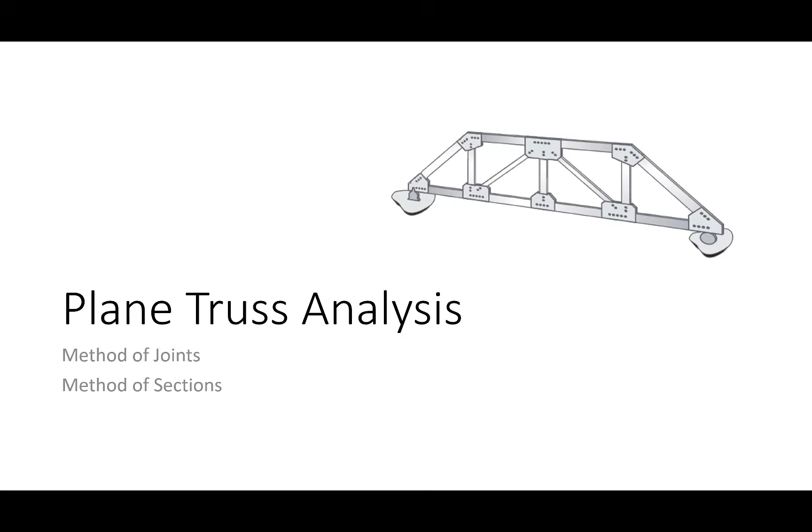Now, I went forward one more slide than I wanted to. There we go. So let's talk about trusses, though, before we go too far down the rabbit hole—let's talk about trusses in the context of civil engineering. First off, hopefully we all know what a truss is: it's just a triangular arrangement of members, or members in triangular patterns.

Characteristics of trusses is that the members are straight, they're not curved or arched, and that they are arranged in some sort of triangular pattern or triangular network. Trusses themselves can either be a component of a structure or they could just be the structure.

Examples of a component of a structure would be like a roof. It's very common for trusses to be roof elements, mainly because they allow for easy drainage of the water or snow on top of the roof. They also are very nice as options for bridges.

The thing about trusses for bridges, though, is that from an economy standpoint, trusses usually are only economical when you have relatively long spans. For short spans, you're not really going to see a lot of trusses constructed because we can just handle that with beams, or a beam and slab, or honestly just a solid slab system if it's really short, or maybe a culvert. We don't really need trusses until the spans get really long.

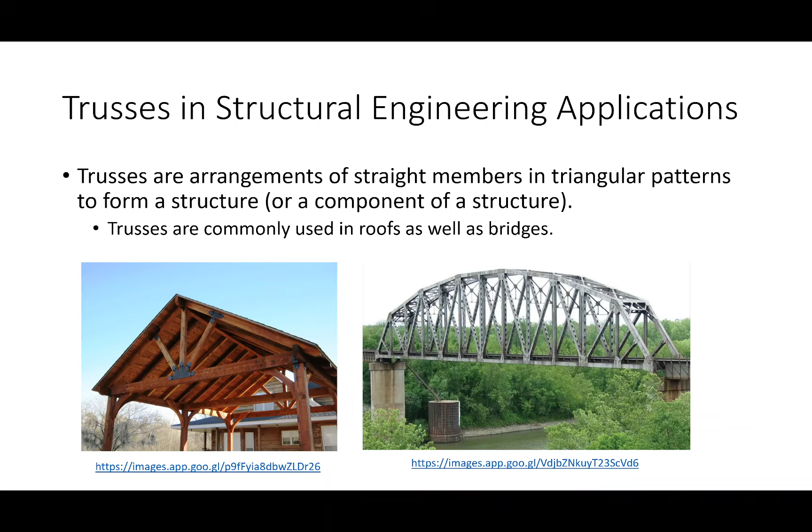Is there a relationship between the two? Yes, but they're not the same thing. Stiffness would be, for example, imagine I had two springs in my hand, and I stretched them with a force of, let's say, 10 pounds. Stiffness would be, if I put 10 pounds on spring A versus 10 pounds on spring B, how much does spring A versus spring B stretch? If spring B stretches more than spring A under the same load, then spring B is not as stiff, even if neither of them break under 10 pounds. Does that make sense? So that's the difference between strength and stiffness. And trusses are incredibly stiff systems.

All right, let's talk about trusses, though, as structures as they relate to our mathematical modeling. Remember, we do not analyze structures as much as we analyze mathematical models that represent them. So we make a series of assumptions when we analyze a truss, and we make three basic assumptions, but these three basic assumptions are really focused on trying to achieve a given result. We'll talk about that result here in a second. But let's go through them each one at a time.

Assumption number one is we assume that all of the members are connected by frictionless joints. Now, is that assumption 100% true in the real world? No. Friction always exists when two surfaces are in contact, so we can talk about the degree of that, but what is this assumption trying to get at? Essentially, it's trying to get at is that there's no forces in the system other than what you can see directly from the model. In other words, you've got member A connected to member B, and they're loaded, but there's not also some friction between two components that we need to account for. We can sort of ignore that for the purposes of analysis. So it's basically trying to say that what's on the model is really what you need to account for, and that's it.

What about assumption number two? Assumption number 2 and 3 are very related, even though it might not seem like it. Assumption number 2 says that all the loads and all the support reactions are applied at the joints.

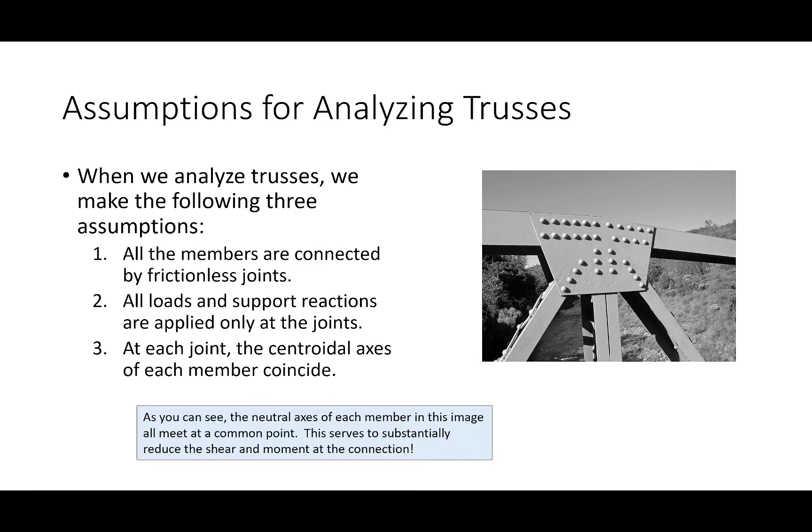That's what I meant when I said these two are related. Assumptions 2 and 3 are saying all the members meet at common points and all the forces are applied to those points. Assumption 1 is basically saying those are the only forces you need to consider—you don't need to consider friction or anything else going on in the system. So it is from these 3 assumptions that we can idealize trusses as only carrying axial forces.

If I have an arbitrary structure, some random frame or beam, and I take a samurai sword or lightsaber through that system, at any arbitrary point I might get 3 unknowns: an unknown axial force, an unknown shear, and an unknown moment. But a truss is a special system. Because of the assumptions baked into the truss, coupled with the way I fabricate the system, instead of having an axial force, a shear, and a moment, I only have an axial force. The question is whether that axial force is in tension or compression. So instead of 3 potential unknowns for each member, there's only 1.

This could be 20 kips in tension, it could be 30 kips in compression, it could be 0. We will talk about zero force members a little bit later—I think probably on Monday. Does that make sense?

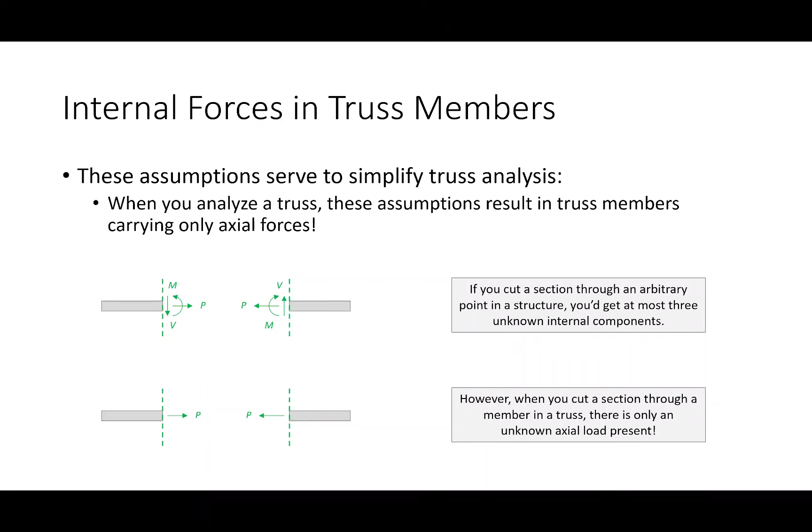Now, has it been a while since you looked at this stuff? Been a while, right? Then this is an apt discussion. Let's go back to the wonderful world of statics, and let's have ourselves a collective discussion about ENGR 213. The very first thing you discuss in statics, after your intro review and all that jazz, is a concurrent force system, otherwise called a particle statics problem.

Y'all remember that? Like a problem where you'd have, I don't know, let's see if this rings a bell. You have a floor, an eye bolt, then a rope going this way, a rope going that way, rope going this way, rope going that way, all through that point. And the question is, what's the resultant? Y'all remember that? Very fundamental problem in statics. What is the resultant?

When you first take statics, this is one of the first classes of problems you deal with—the particle statics problems. If you remember, let's go back to statics. Does anybody remember how do you solve this problem? So this is F1, F2, F3, F4. Does anybody remember how you go about solving this problem, how you did it in 213?

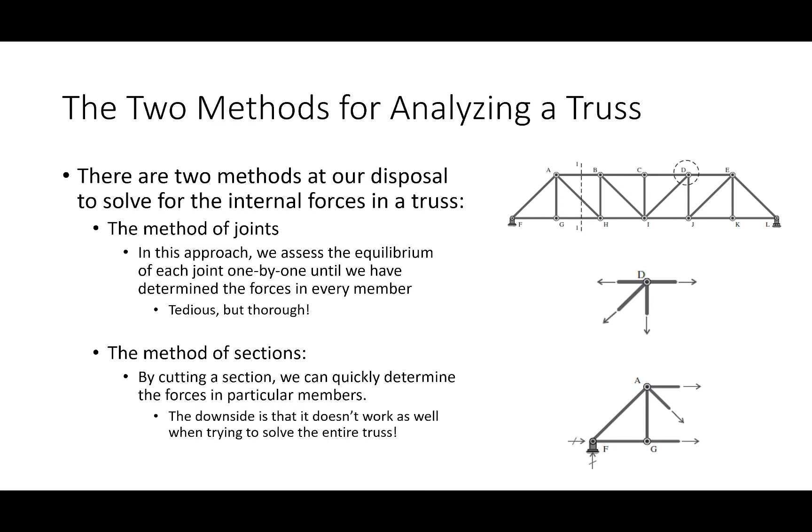So let's talk about the method of joints. That's what we're going to talk about today. Now, the method of joints is an assessment of concurrent force systems. As a result, we do not have the ability to apply the sum of moments because there are none. At each joint, all the forces meet at a common point.

So what does that mean for you as the analyst? Whenever you assess a joint and you're trying to assess the equilibrium of a joint, you can only assess a joint that has at most 2 unknowns. Why? Because you only have 2 equations of equilibrium. You don't have 3, because all the forces meet at a common point, there are no moments.

So you have to be a little bit strategic when you utilize the method of joints. And I'm going to go through that strategy with you in the example we're about to do today, to explain how you should plan out doing a truss problem. We're going to sort of do it on the fly with today's example, but on Friday's example, we're going to plan it out at the very beginning.

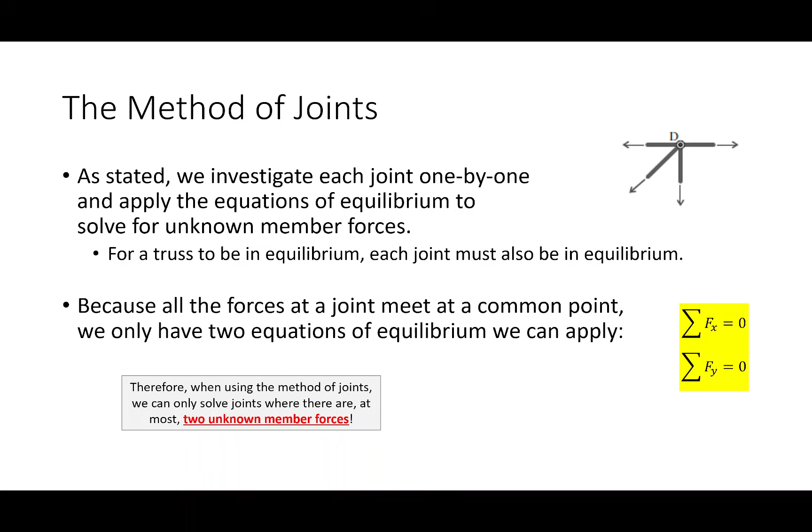Because I find that if you take a minute and plan out how you're going to do a truss analysis, it will make the flow of that problem so much smoother, instead of just diving headfirst into a problem without having a plan of how to get out. Does that make sense? Let's see what I mean when we go through this example. Let me pull this up on the notebook here.

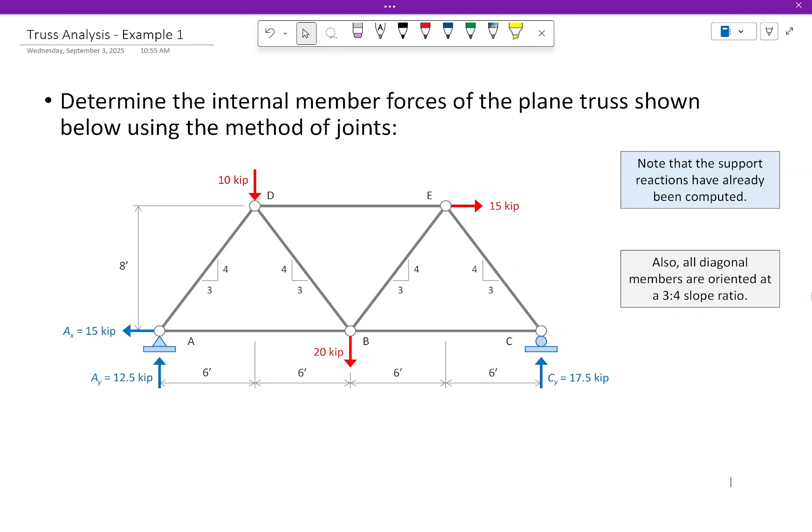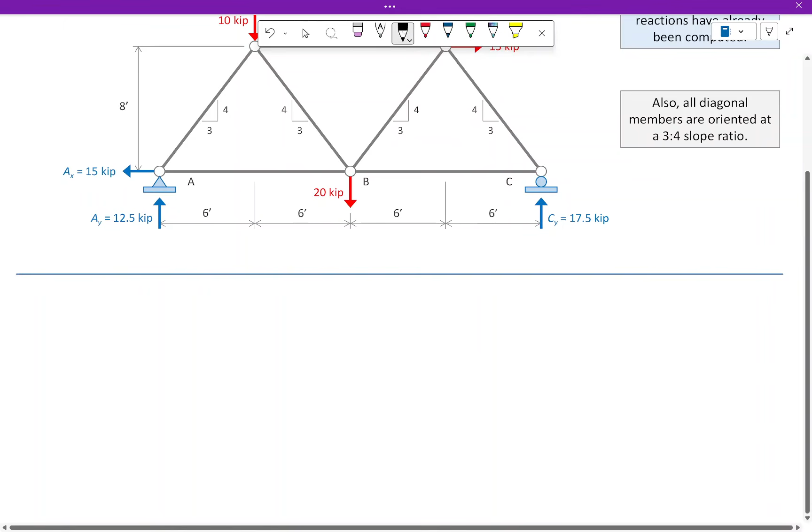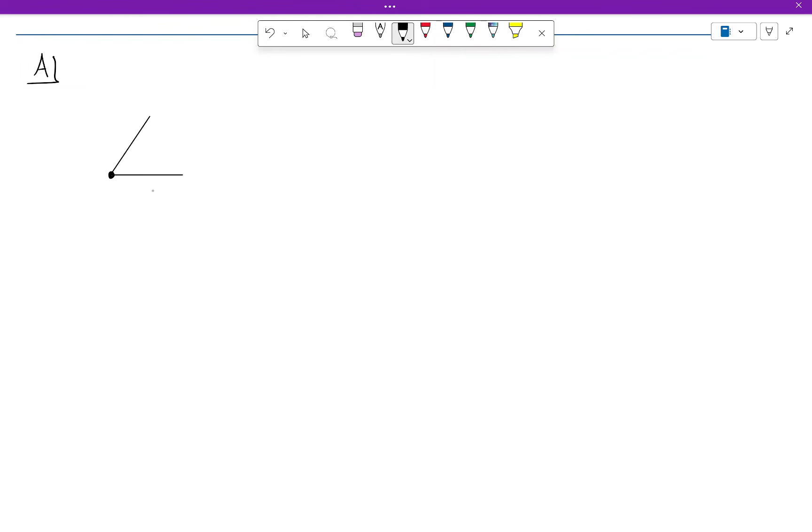So I'm kind of a left to right kind of guy, so I'm going to start off with joint A. Let's look at joint A. Now I've got this written here on the board so I can eliminate some scrolling up and down. All right, so let's look at joint A. I tend to do these in order—the first thing I'm going to do is draw the members going through joint A. About like that. So those are the members going through joint A, that and that, just these members. Essentially, when I do an equilibrium analysis of a joint, I'm just looking at this joint.

Next, if I have a diagonal member, I'm going to indicate that slope ratio right there. So step 1: draw the members. Step 2: indicate the slope ratios for any of our diagonals. Step 3: known forces.

So what forces are known that are passing through joint A? How many forces do I know that are passing through joint A? 2—this one and that one. So let's just write those down.

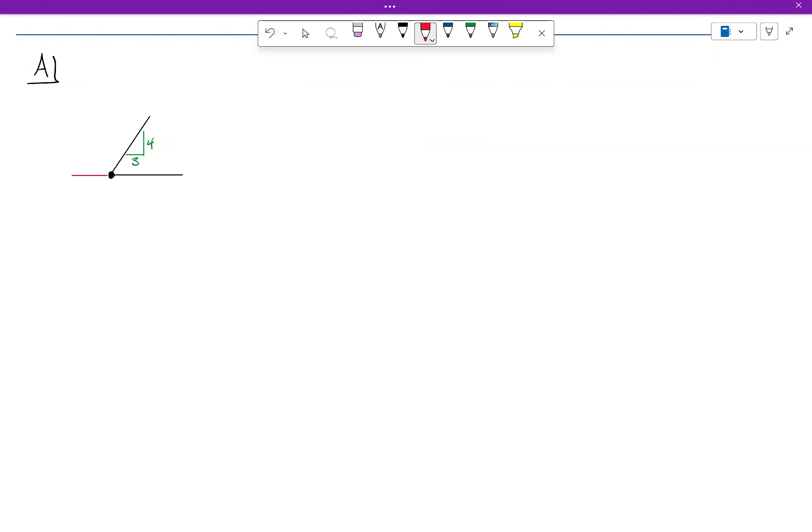Okay, so this vertical one, and that one's 15. Okay. So step 1, our members, step 2, our slope ratios, our known forces, and then our unknowns.

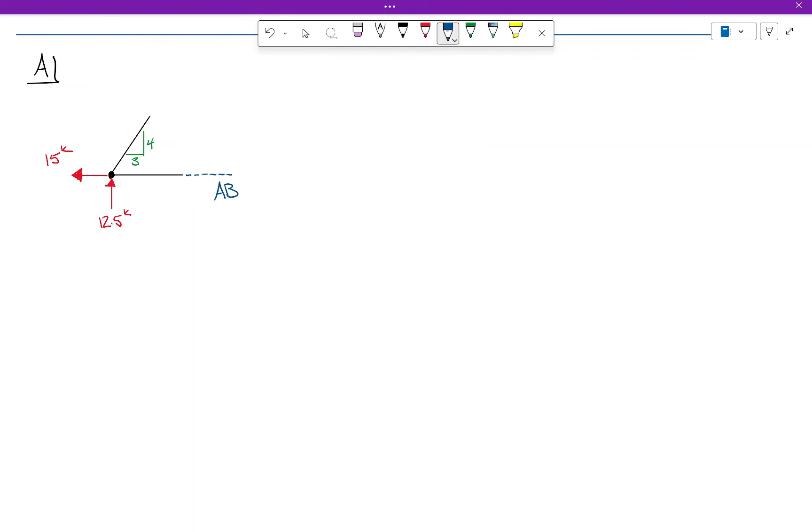So when I put my unknowns, what I like to do is mark this one like that. We'll call that AB, because it's from A to B. And then this diagonal, I like to split up into X and Y components: ADX and ADY. Does that sound good?

Part of the issue with a joint analysis is really just making sure that you account for everything. One of the biggest mistakes you can make on one of these problems is forgetting something, like oh, I forgot the 15, or I forgot the 12 and a half. So be a little bit systematic when you draw them out, because that's one of the biggest challenges.

Okay, now let's go through our unknowns. How many horizontal unknowns do you see present on this joint? Just one. Horizontal, oh sorry, 2. I see this one and this one. How many vertical unknowns do you see? 1. Okay, so should I handle my sum of forces in the y direction first?

Right? I mean, if I sum forces in the y direction first, what does that tell me? What is ADY? 12.5 kips down. There we go.

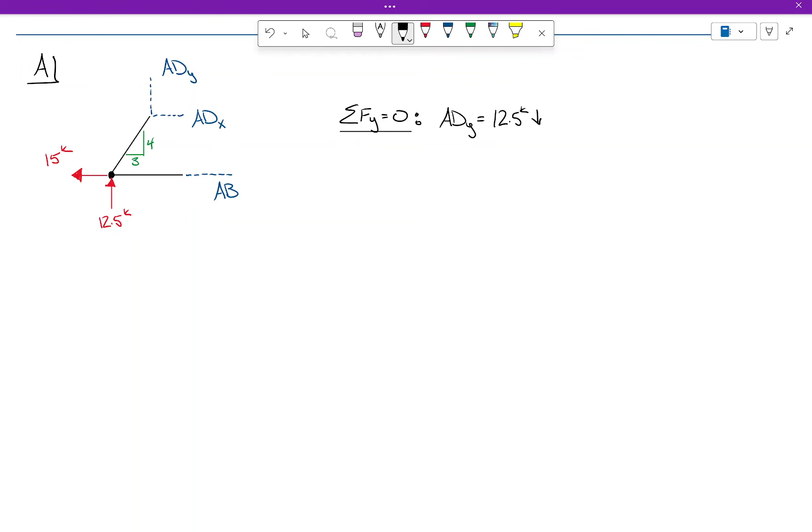All right, now one little note before we start going too far down this. Okay, so if I have a force that goes along an axis, that force could either go up or it could go down, right? Like if I'm talking about a diagonal path, it could either go up or it could go down. Now, if I split that up into x and y components, it's either going to go up and over, or down and in.

So what I'm saying is whenever we're talking about axial forces, are we saying that goes down? We're saying ADY goes down because we just figured that out. If ADY goes down, that means ADX has to go in. In other words, like these are correct. Having this go down and this go like that, that's wrong. You can't have that. They either both point towards the joint or they both point away from the joint. Does that make sense? They can't, because at the end of the day, those are components of a force acting along this axis. It either points to the joint or away from the joint. Make sense? Because that's all we're doing, we're taking these and splitting them up into x and y components.

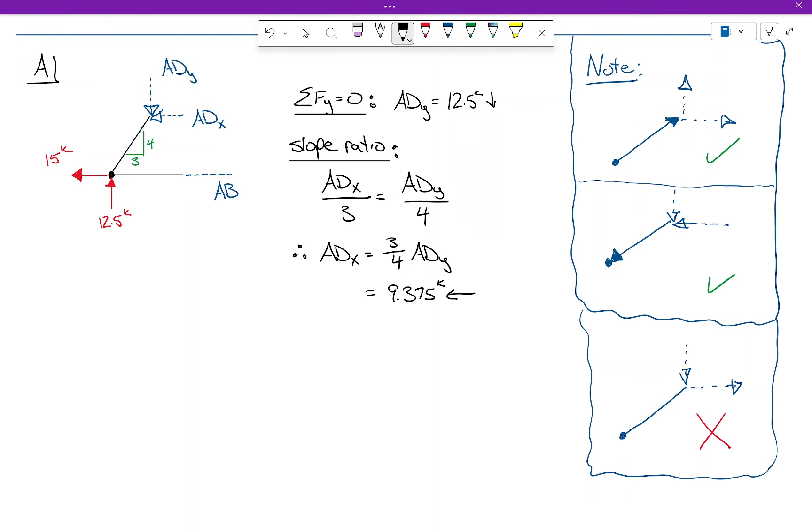Okay, let's talk about AB. All right, so now how many unknowns do we have now? 1, which is AB, and we're going to solve for that by summing forces in the x direction. So let me move this down a little bit.

So, do we need to draw the table, or can everybody eyeball this? I think we've got 15 kips going to the left. We've got ADX going to the left. We know what ADX is. How much do we have to have going to the right in order to maintain equilibrium? 24.375. Do I have a second? I think we can all see that one, but does that sound good?

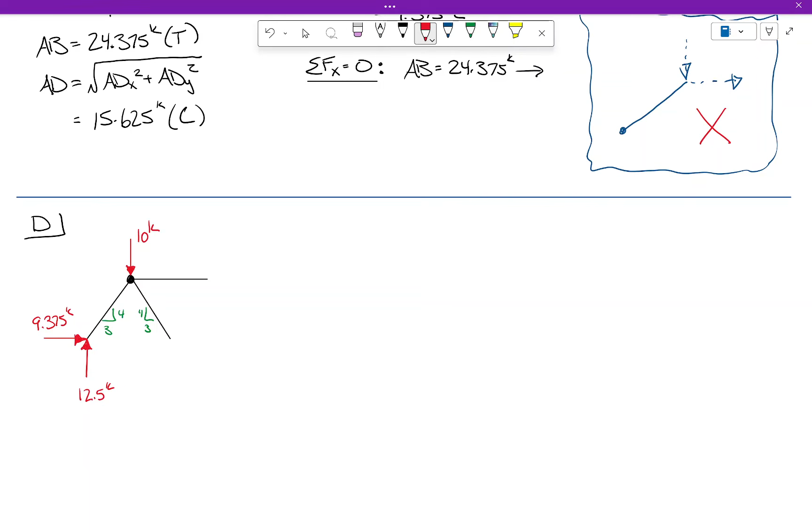Okay, the hardest thing probably to make sure you're familiar with as your bookkeeping is the arrow direction. Now I propose for these arrows that they need to face this way and this way. Now that is opposite to what we found out before. For example, I've got the 9.375 going to the right, but up here I had 9.375 going to the left. What gives? Why are they opposite?

Here's a marker. I want to take this marker and squish it, put it in compression. I'm going to take this hand and push it that way, this hand push it that way, so I'm pressing my hands in opposite directions. One hand's going one way, one hand's going the other way. If I want to yank it in tension, yank, yank.

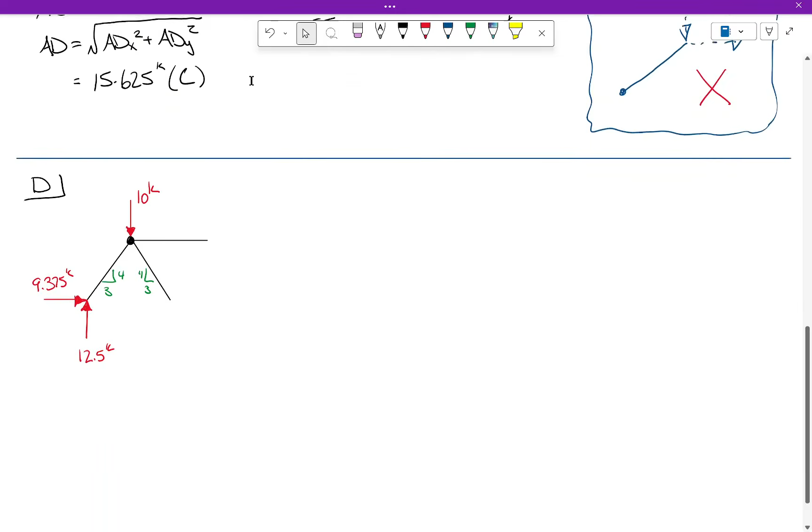Opposite, right? I'm looking at the other joint, okay? What I'm saying is on joint A, the forces went into the joint. On joint D, the forces go into the joint at equal and opposite directions. Does that make sense? That's what I'm getting at there.

List my unknowns, my horizontal and vertical right here, my horizontal there because it's just a horizontal member, and I've got my truss over here where this is DE, that's BD, so we'll just do X and Y.

So what equation of equilibrium should I use first? Sum of the forces in the X direction. X or Y? Probably Y. Yeah, because we've got two unknowns in the X, one in the Y.

Okay, so let's see if we can do this bookkeeping. Does anybody know what BDY is going to be? 2.5 kips down. There we go. Okay, so because this is going up 12.5, this is going down 10, we need another 2.5 going down.

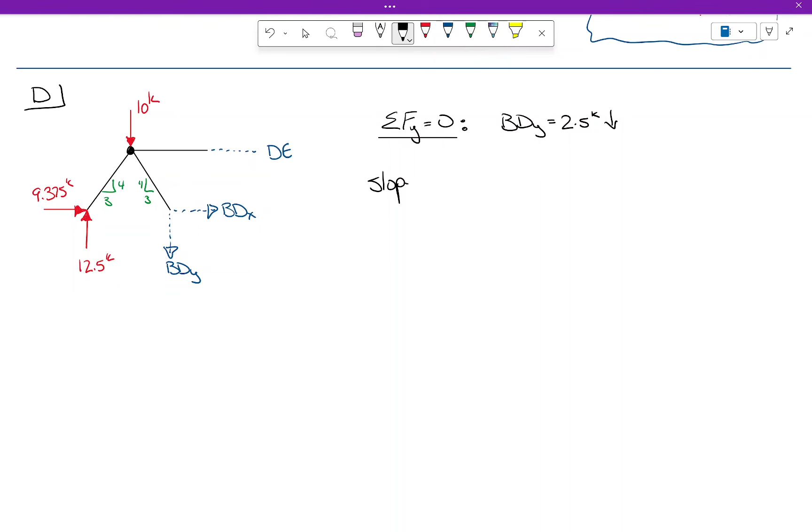And so that's just going to be the same thing we did before, 3/4 of BDY. And so what's 3/4 of 2.5? What is that? 1.875?

To the right. And then now I just sum forces in the x direction. And what do I have? I have 9.375 going to the right, 1.875 going to the right. So I need DE to go to the left, don't I?

And DE is going to be what? 9.375 plus this. So 11.25. Right?

So, I mean, what do I have? Okay. We're running short on time, so I'm going to run through the math here on this. So, Pythagorean theorem on this is going to get you 3.125 kips.

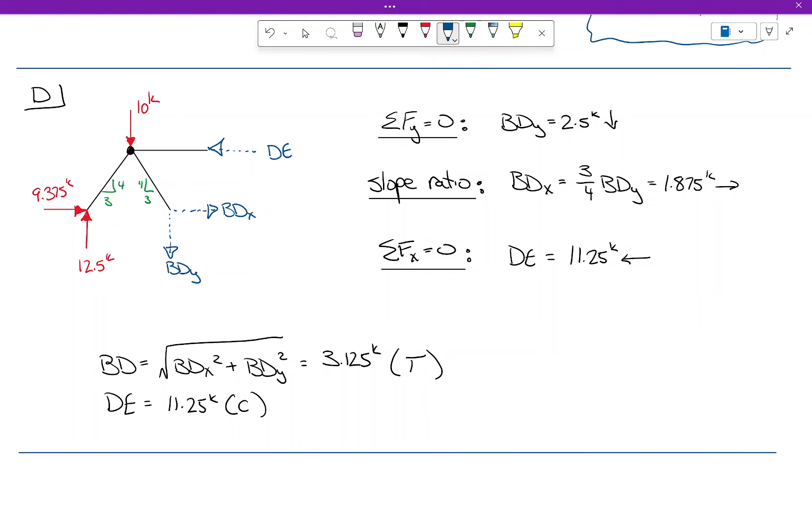If you want to continue this problem, I'm just going to give you the remaining results. So, I can tell you that BE is 21.875 in tension.

I'm going to give you BC, which is 13.125 kips in tension, and CE is 21.875 in compression. Okay.

Does that make sense? All right. The other thing I'm going to tell you is I'm giving you a homework problem today where it's a truss analysis. What I would like for your final answer is for it to look sort of something like this. You don't have to do the little squiggles, but I'm saying a final answer with all the forces on the truss.

Just member force, so that it's all graphically there. That truss is very much like this one in the sense that all the members have the same slope ratio. They're all, the loads are pretty straightforward. I actually think it's maybe a little bit easier than this one.